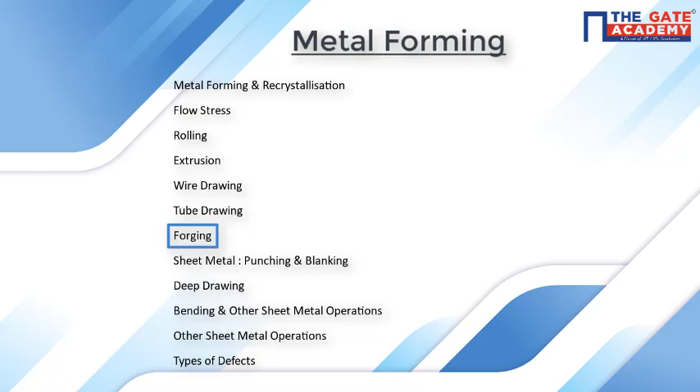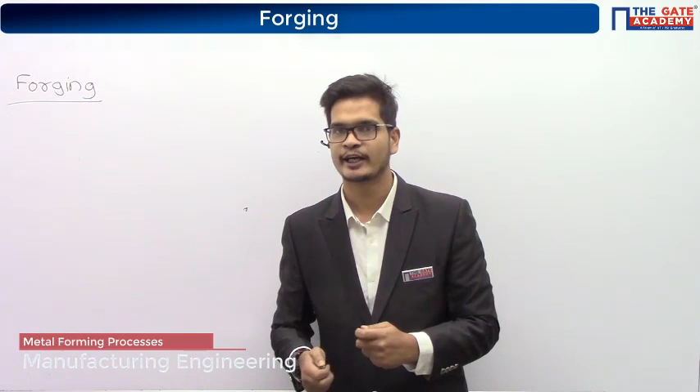Next we are going to start forging. If you are coming from a village area, you might have seen a forging operation. In villages, what they do is heat up a metal until it becomes red hot, and then they start applying force by using a hammer.

Because of the force applied by the hammer, the shape of the metal is going to change. This is called the forging operation. So the operation I'm telling you is very small scale. Just by using a hammer, they were able to change the shape of the heated metal.

What if you want to make a large size component? For large size components, in industries we have bigger presses. By using the force of those presses, we can change the shape of the metal.

So I was saying blacksmith. Yes, see.

Avengers second part, how did Thor make his Stormbreaker? Most probably he used a combination of casting and forging.

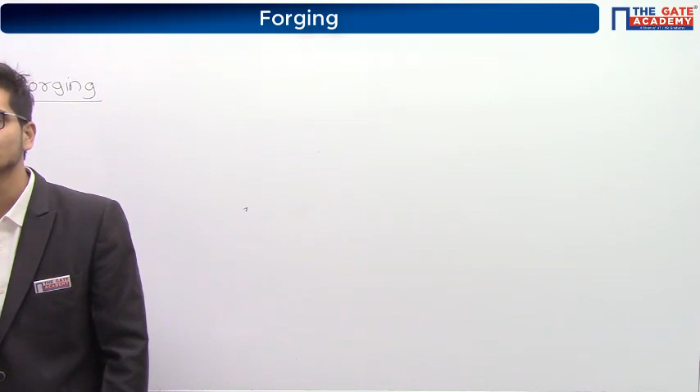In Game of Thrones, how do they make the Valyrian steel swords? By using forging. They heat up the metal, then they start applying the force. Because of the force, the shape of the metal changes. So this is the forging operation.

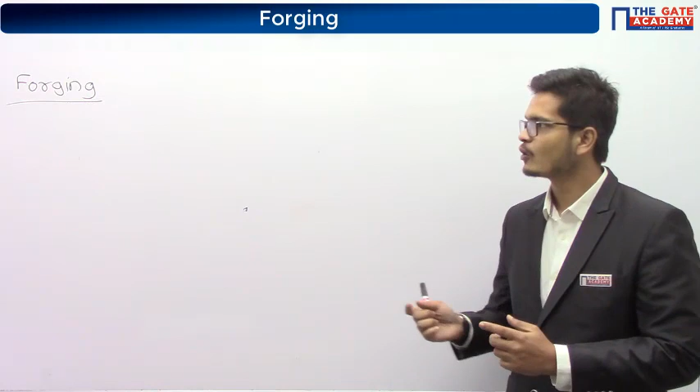All the processes that we have seen till now, whichever process - rolling, wire drawing, extrusion - in all these processes, what was happening is we are getting a uniform cross section. Whatever cross section was there in the initial component, that same cross section will be present throughout the component.

But forging is the only metal forming process in which you can get a non-uniform cross section. All the operations that we have seen till now give a uniform cross section - throughout the length we'll have the same cross section. But forging is the only operation in which you can also get a non-uniform cross section. So that is again one advantage in case of forging.

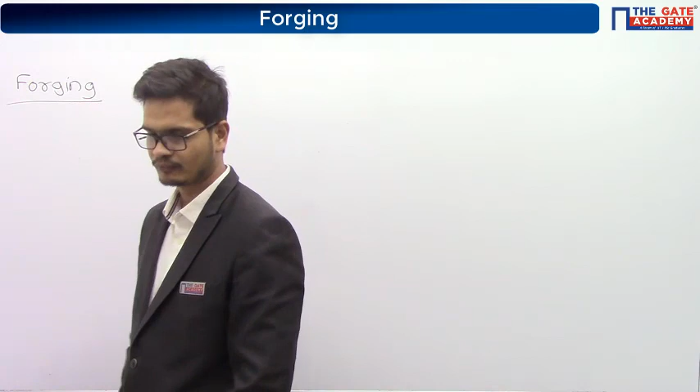So please write down, please start copying. Forging is the only process used for producing a non-uniform cross section component, whereas all other metal forming processes are used for producing uniform cross section components only.

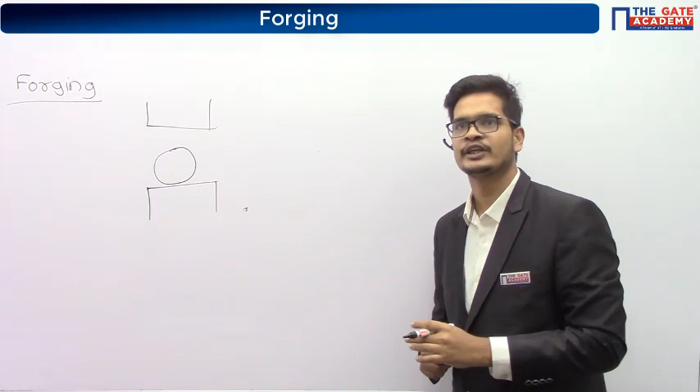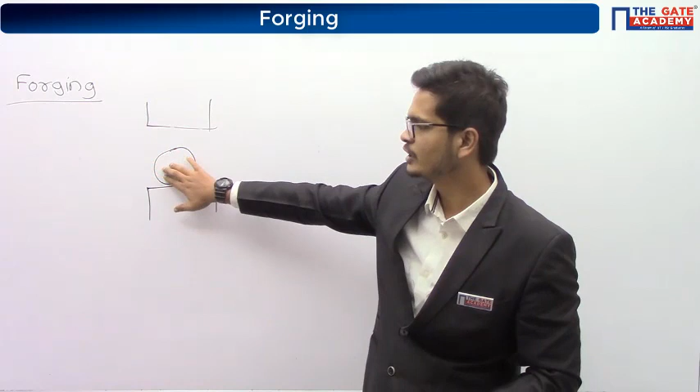Next point. Before dictating the next point, what happens is you'll have two dies. In between the dies, you'll keep the metal, generally heated metal. So we'll be using two dies, and in between the two dies we'll keep the heated workpiece. Because of the force applied by the die, the shape of this workpiece is going to change.

Now, how are you applying this force? Based on this, forging can be classified into two types. If the force is kind of an impact load - you are applying a load by impact, and it is an intermittent load, you applied the load then you remove the load - then it is called drop hammer.

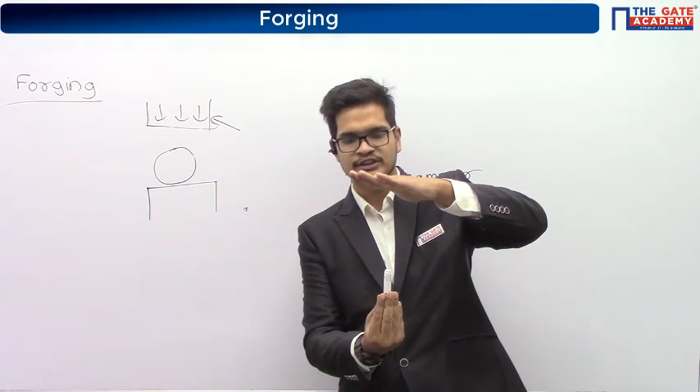You are just dropping a hammer. And if you are applying a continuous load - a press is simply continuously pressing the workpiece - then it is called press forging. So based on the load, forging is classified as drop hammer and press forging.

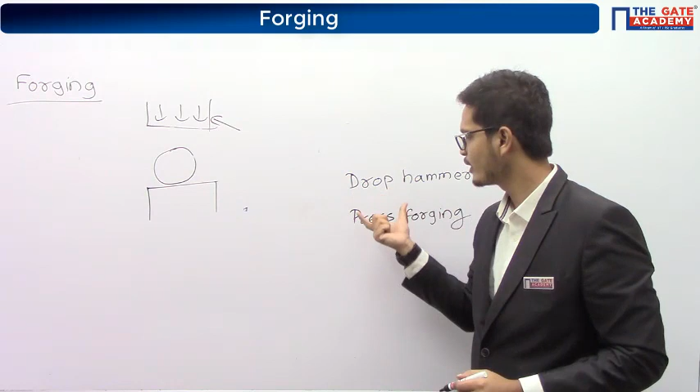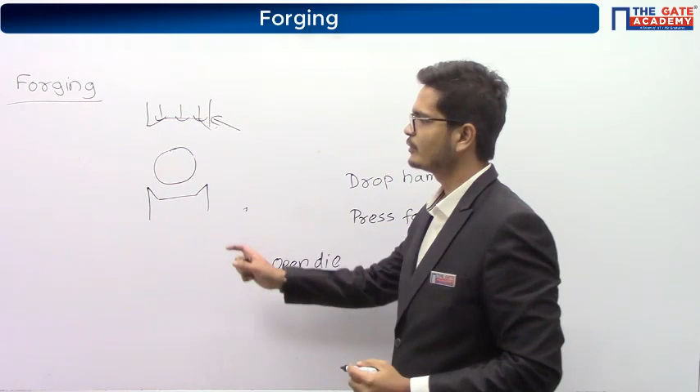Next, based on the shape of the die: if both dies are flat, it is called open die. And if both dies have some particular shape, the workpiece will take the shape of the die cavity when the die closes. So if the dies have a particular shape, it is called closed die forging.

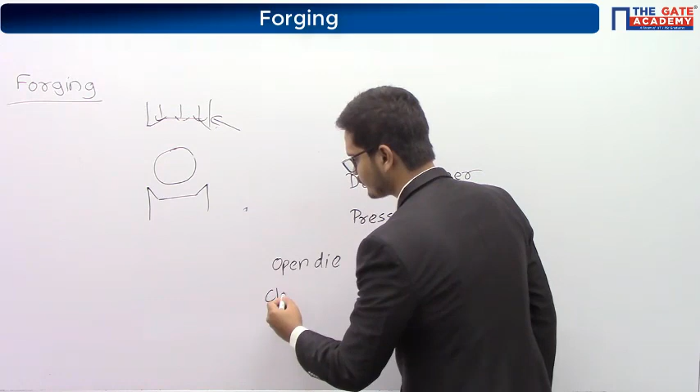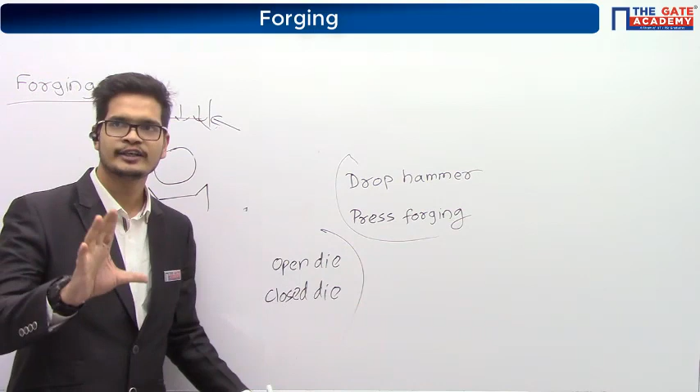So there are two ways of classifying: one is open die and closed die, and the other is drop hammer and press forging. This one is based on type of load, this one is based on the die used. Wait, I'll dictate all this.

Please write down. In forging, raw material is compressed between two dies until the required shape and size of the component can be obtained.

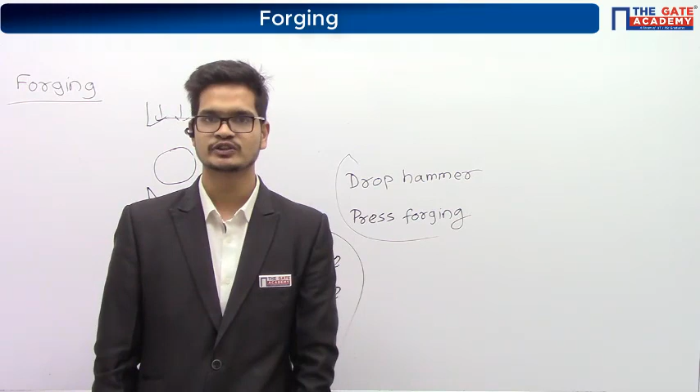Either by using a continuous force, or by using an intermittent impact load.

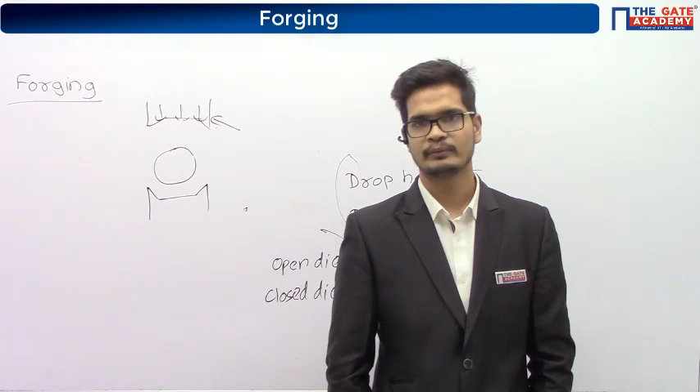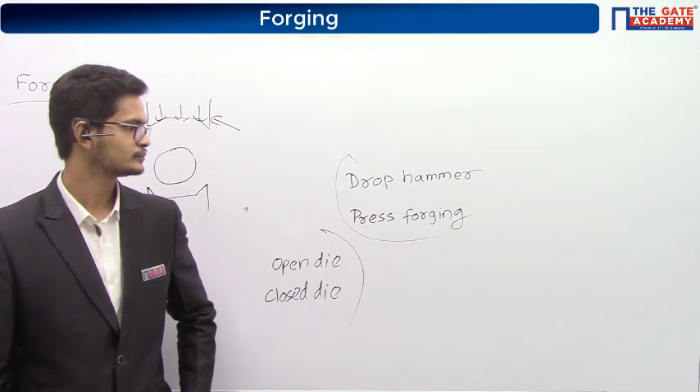Next point. Based on the load, the forging operation can be classified as drop hammer and press forging. First is drop hammer, and the second one is press forging.

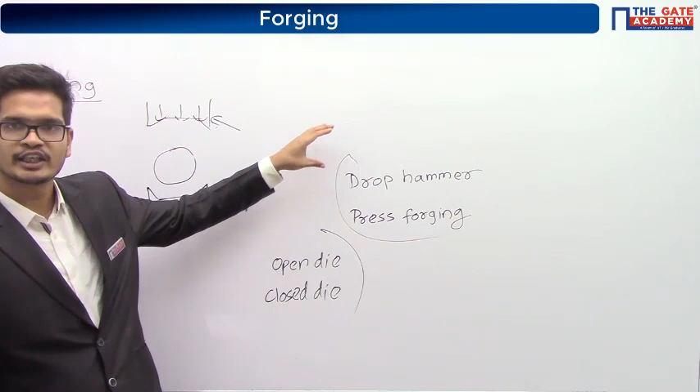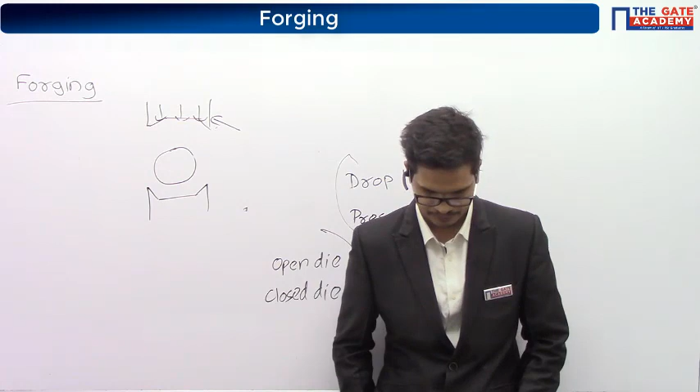Okay, next point. If the force applied in forging is an intermittent impact load, then it is called drop hammer forging.

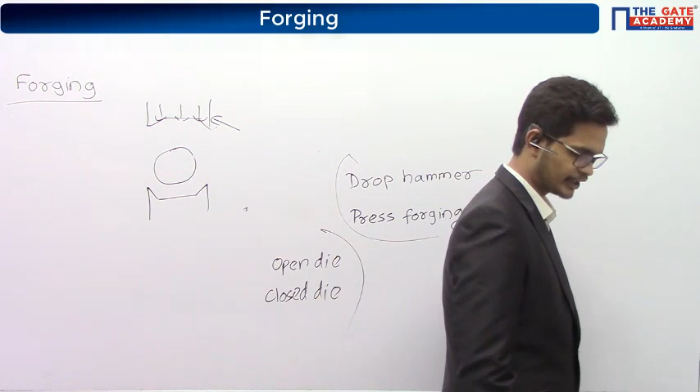Next point. If the force applied is continuous force, then it is called press forging.

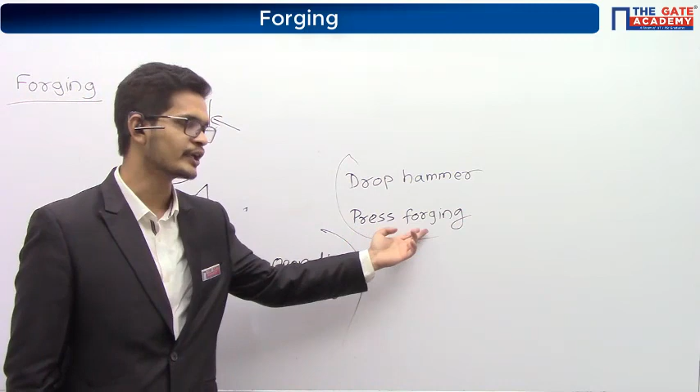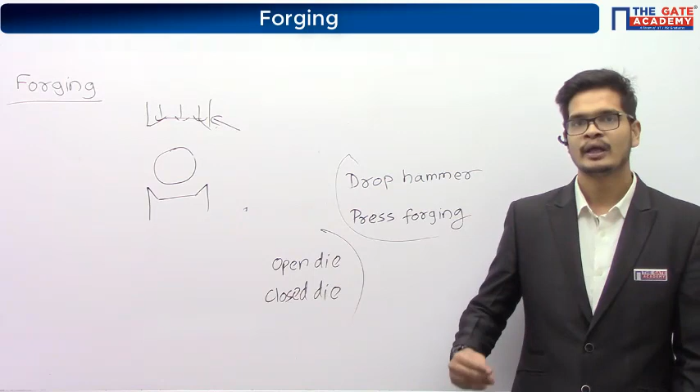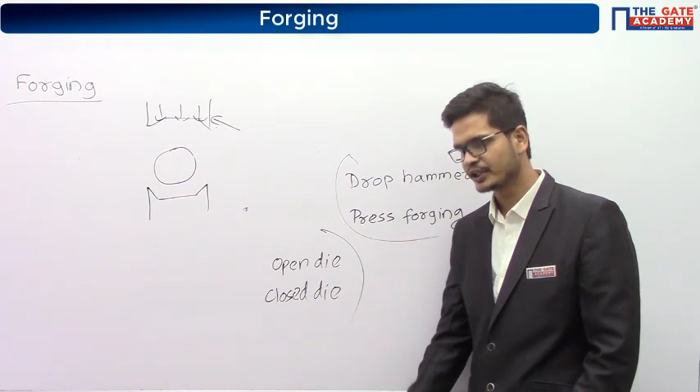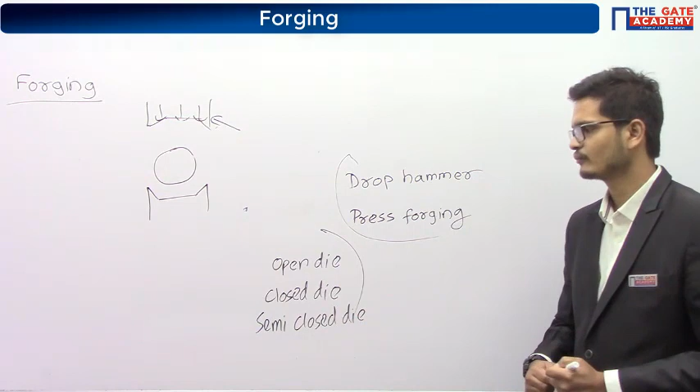Next point. Based on how the shape is obtained, forging can be classified as open die forging, closed die forging, and a combination of this is semi-closed die forging.

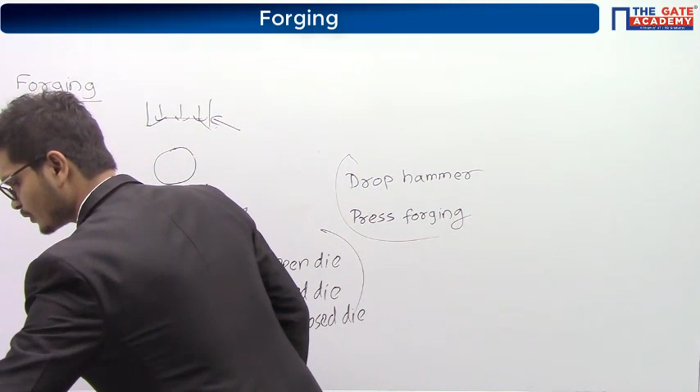Why I am telling this classification based on shape obtained - you will understand now.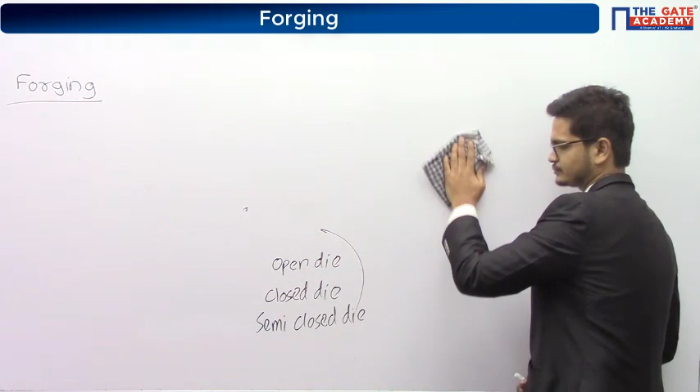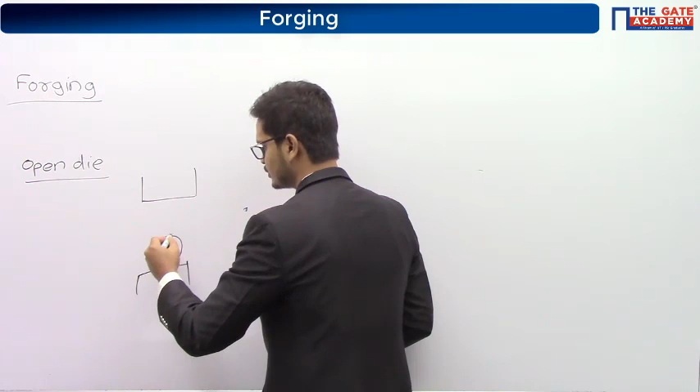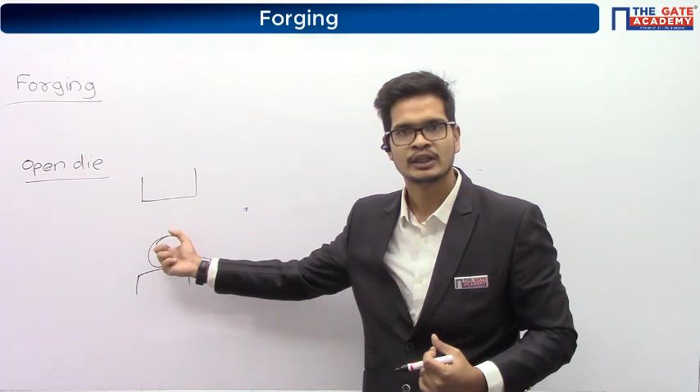See, first one was open die. In open die, we are using flat dies. So if you want to get a particular shape, what will you do? You'll have to change the position of the workpiece in between two loads.

Let's suppose this has come down, and when it comes down, it will make the top surface flat. And when it is making the top surface flat, the outer surface will have some projection, like this.

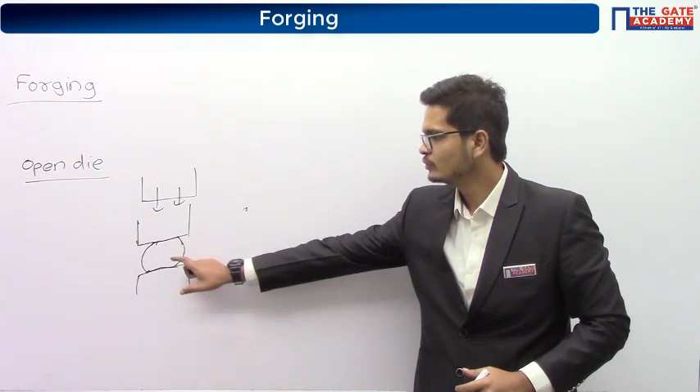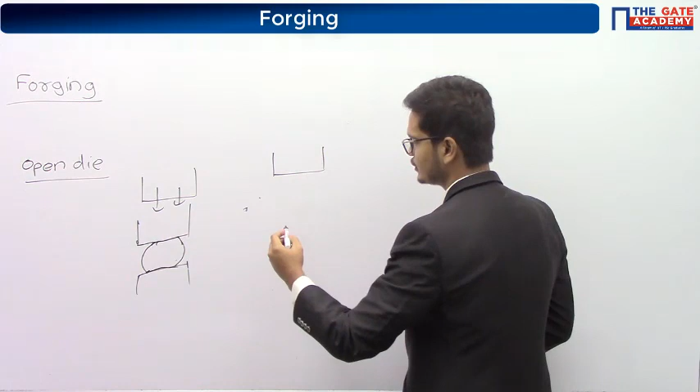Now you want to press at some other point, you want to apply load at some other point. You simply rotate it, you move back the die. The die will come back to the top position, the bottom die will remain fixed. Now the workpiece is looking like this.

Again this die will come down now and it will apply load here, on this. And again we'll be able to change the shape. Hence, for getting a particular shape, what we are doing here is changing the position of the component in between two loads, in between two strikes.

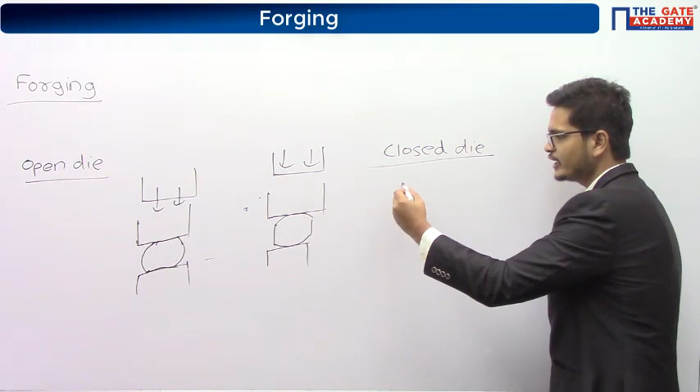Now in closed die, what is happening? In closed die, whatever is the shape of the die cavity, the workpiece will simply take that shape - the workpiece will take the internal shape. This is closed die forging.

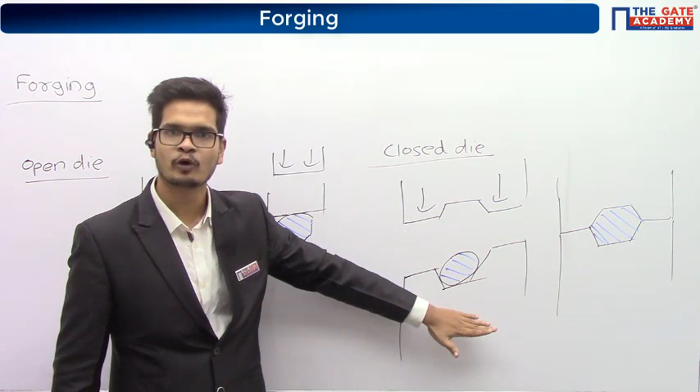In semi-closed, what will happen? We'll have only one bottom die with a particular shape, and the top die will be a flat one. That flat die will apply the load, and the workpiece will take the shape of the bottom die.

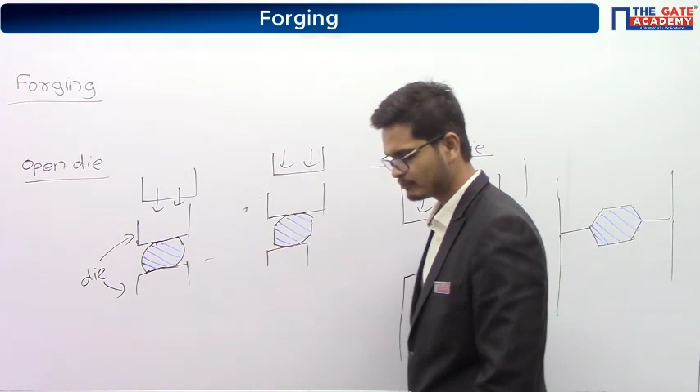So please start writing this: open die forging. In open die forging, two flat dies are used. The bottom die is fixed, whereas the top die is attached to a ram, and it comes down along with the ram.

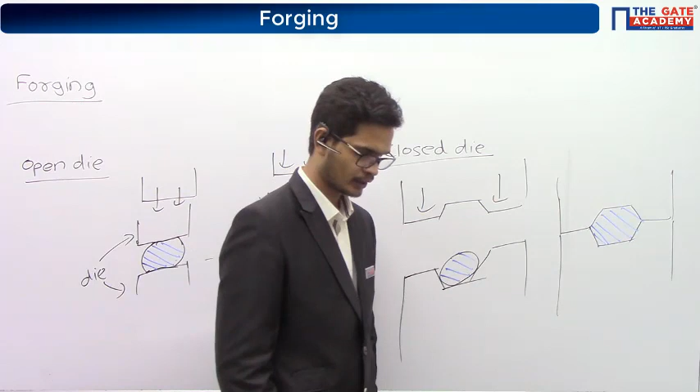Next point. The shape and size of the component is obtained by changing the position in between the blows, in between the loads or blows, you can say.

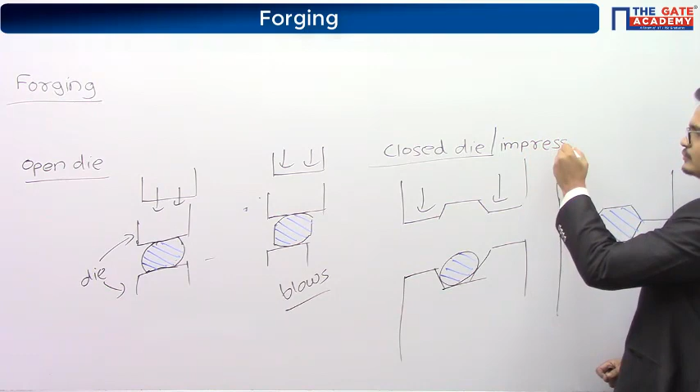Okay, next is closed die, also called impression die. In this, the shape and size of the component - so we are writing about closed or impression die.

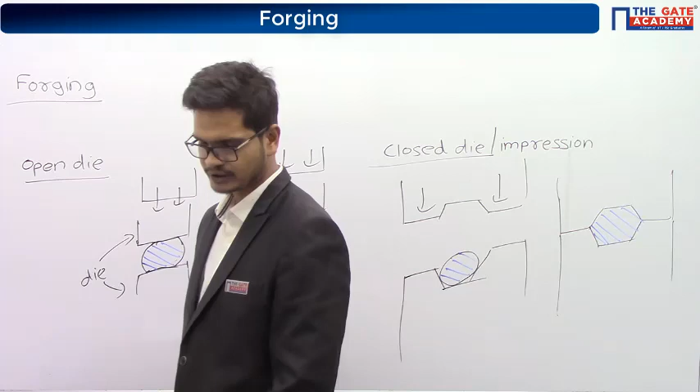In this, please write down: shape and size of the component obtained is same as that of shape and size of the two half dies. That is the shape of the dies.

Is impressed upon the component. Hence it is also called impression die forging.

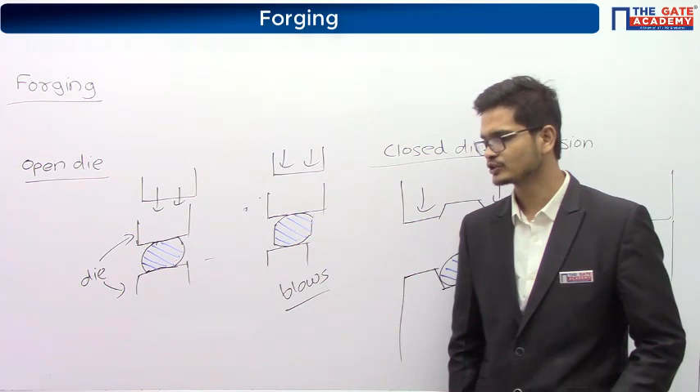In this, the shape and size of the component is same as that of the half die.

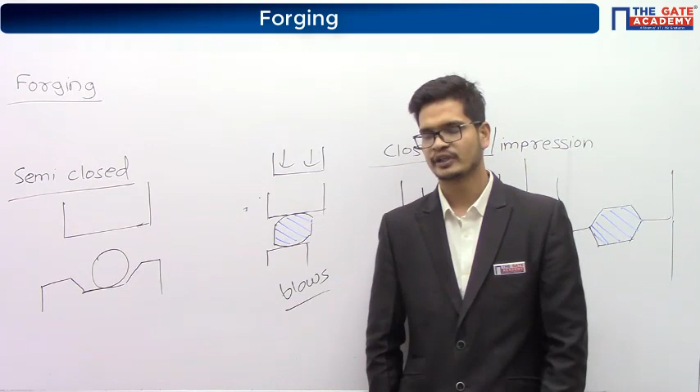Next point. In this, the position of the component can be changed in between the blows.

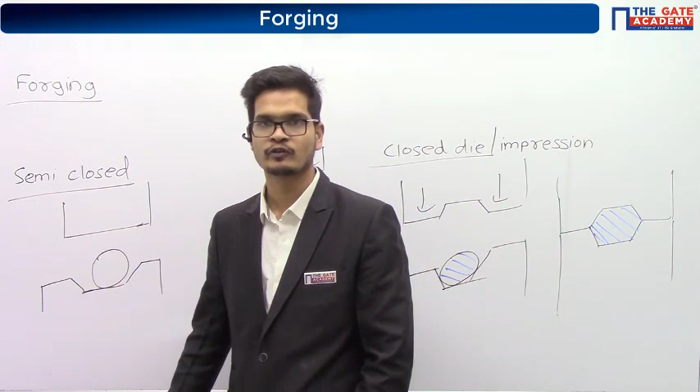So out of the three - open die, closed die, and semi-closed die - only in open and semi-closed die can you change the position of the component. In closed die, once you have started the operation, you cannot change the position.

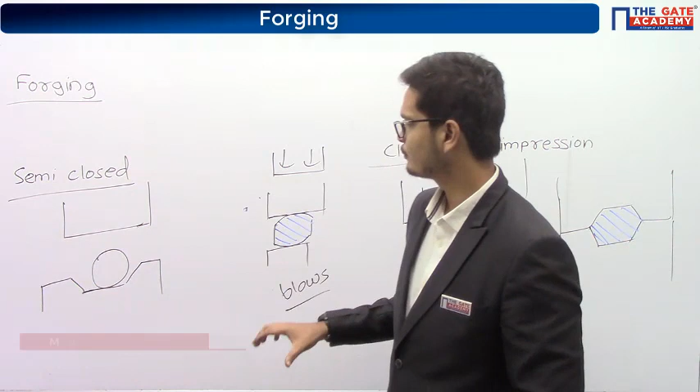Now let us say you are performing an open die operation. Let's say you want a product of uniform thickness.

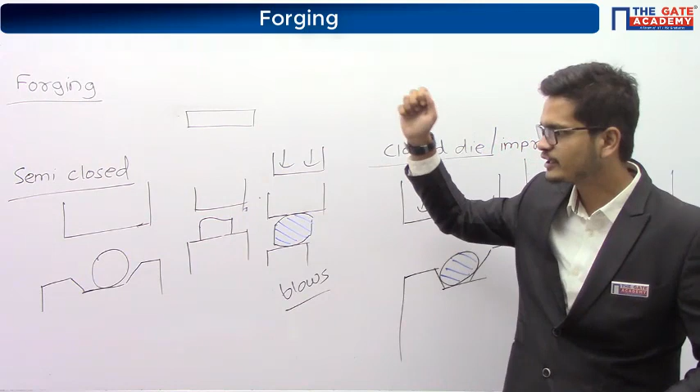But you have got a product of non-uniform thickness. At one point there is more material, at another point there is less material. What will you do? You are doing open die forging operation and you want a workpiece of uniform thickness, but there is more material at one point and less material at another. Edging is okay, but what is happening behind it? Wherever more material is present, at that point you will apply the load, and you will make the material flow towards the area with less material, to get the uniform thickness.

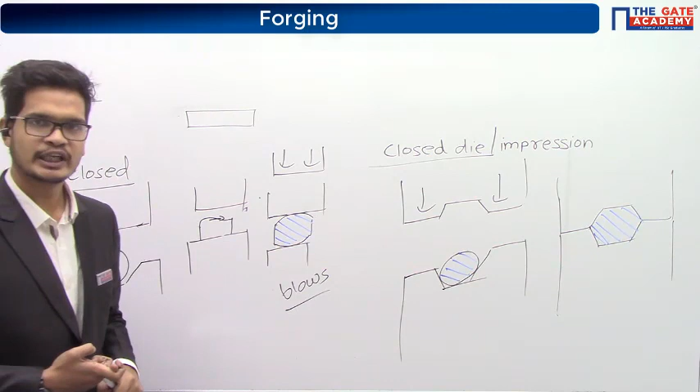The same thing you can do in semi-closed die also. But in closed die, first of all, you are using a fixed shape of the die, so you cannot change the direction of the force.

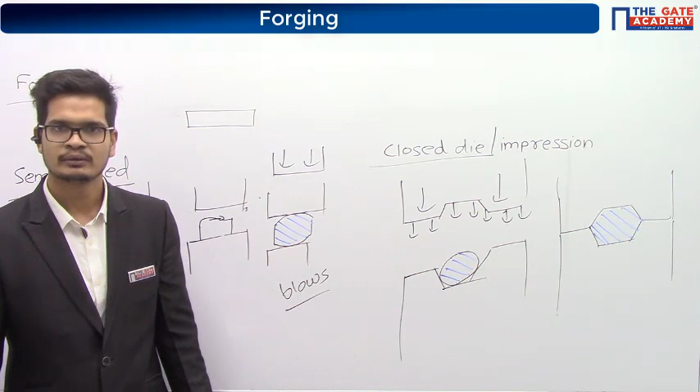If more material gets collected at one point, due to the flow of material, we cannot exactly predict how the material is going to flow. What if more material gets collected at one point, and because of that, less material is present at another point? In this case, we cannot change the direction of the force. Therefore, if more material gets collected at one point, a cavity will be formed at the point where there was lack of material.

Now to avoid that, what we are going to do is, we'll always take the volume of raw material nearly 20 to 30% more than the required volume of the workpiece, so that even if more material gets collected at one point, there is no lack of material for another point.

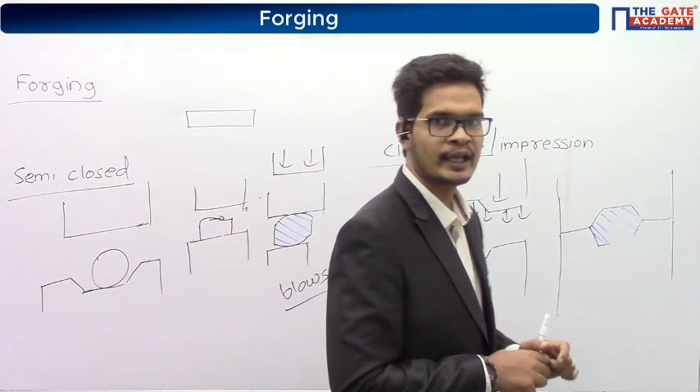But what will happen is, if you are using more material, the dies will not be able to close properly. Hence we'll have to give some space on the dies, so that the excess material that you are using can flow into that. Now, because of this, some projection will be formed on the workpiece.

The projection that is formed on the workpiece is called the flash. And the extra space that you gave on the die is called the gutter. So, extra space given on the die is called gutter, and the extra projection found on the workpiece because of the gutter is called flash. Later, the flash is removed by a trimming operation.

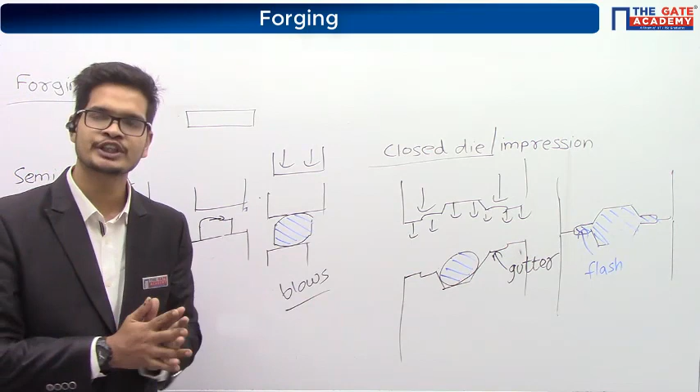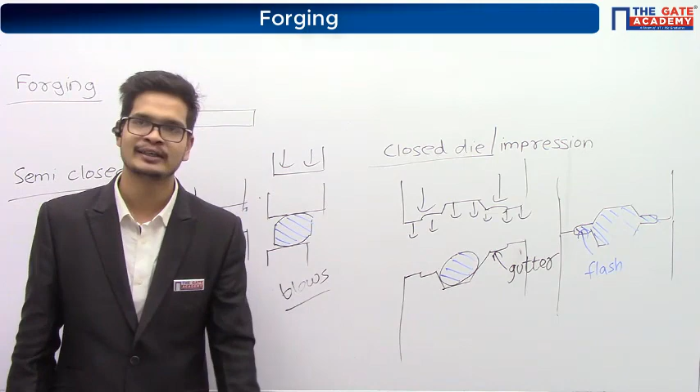It's easy now, they kept the name gutter, so you'll always remember it. If they kept something difficult, you'll forget, right? So it's easier this name, better for you. In fact, it's a very popular question in different exams: what is the extra projection on the component called? It is called flash. What is the extra space provided on the die called? It is called gutter.

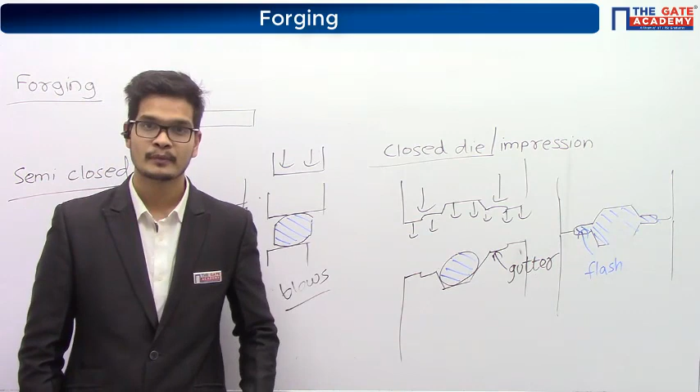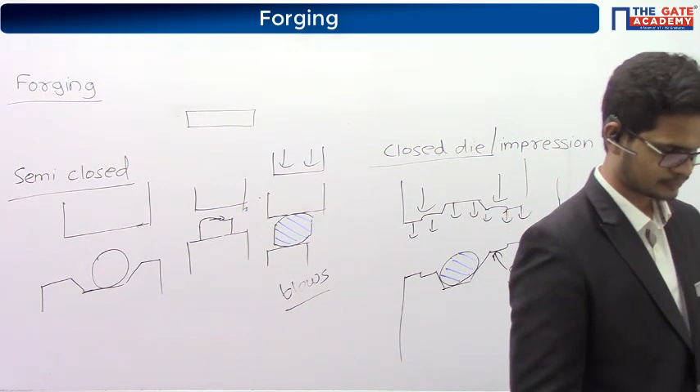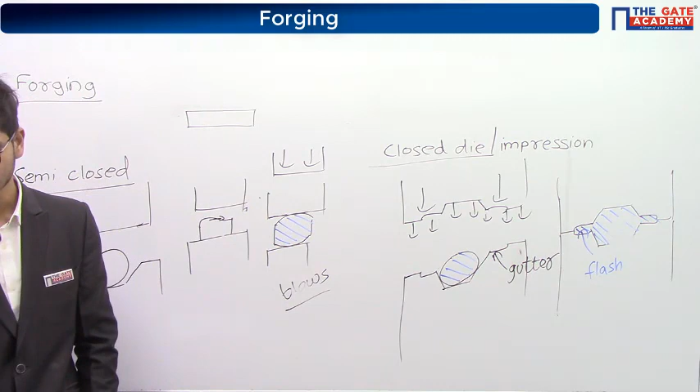So please write down: in open and semi-closed die, if excess material is present at any location, and there is shortage of material at another location, we can apply the force and make the material flow from the excess location to the shortage location. Hence there is no need for extra metal.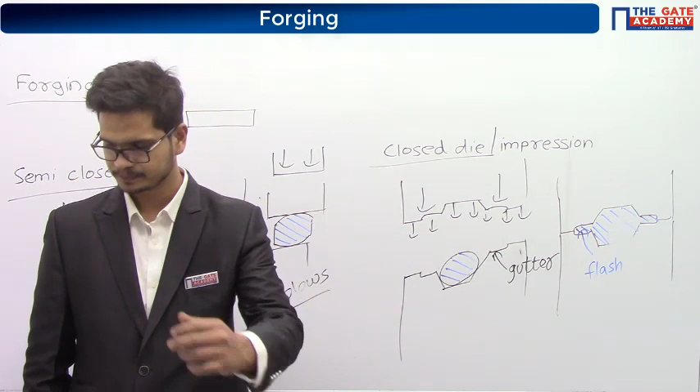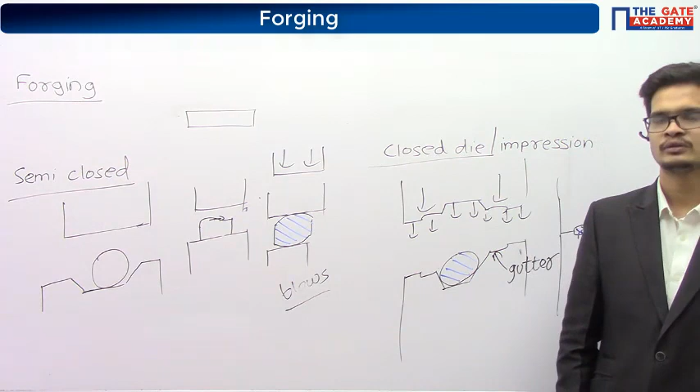But in case of closed die forging, if we take the volume of raw material same as the volume of the finished good, and more material gets accumulated at one point, then there will be shortage of material at another point. This will lead to the formation of an unfilled zone.

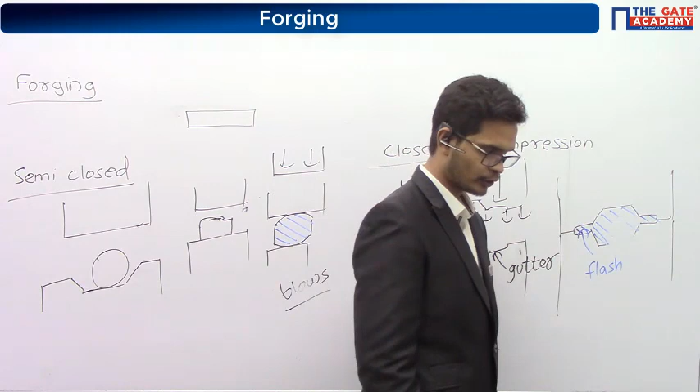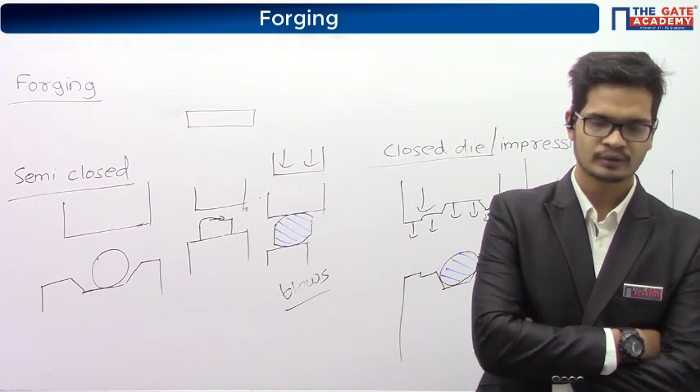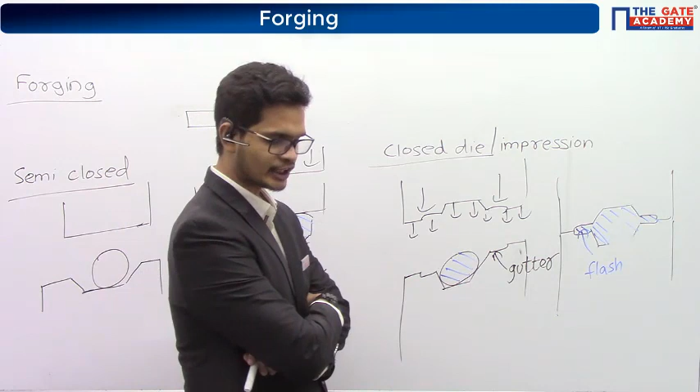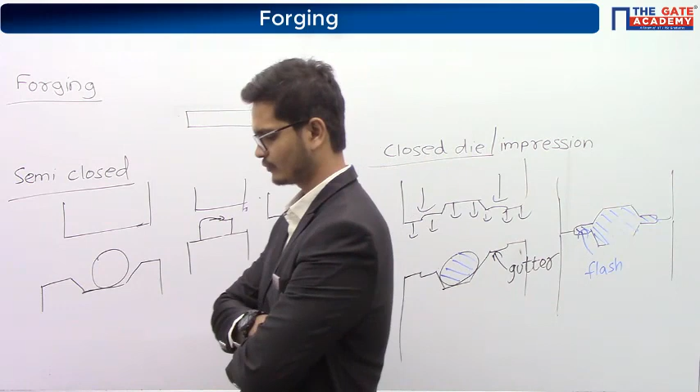To ensure that the die is filled completely, some excess material will be taken, and some space must be provided on the dies for the flow of excess metal, so that the dies are able to close completely.

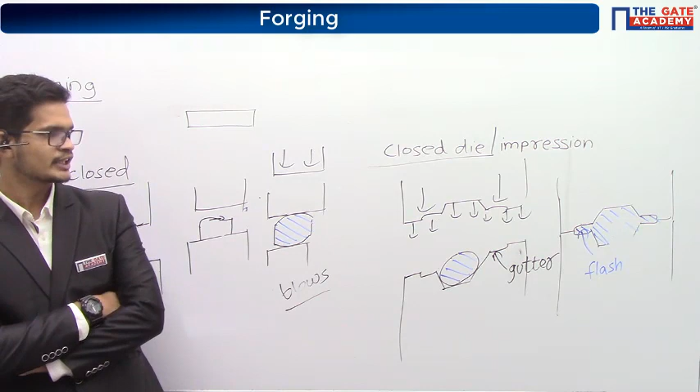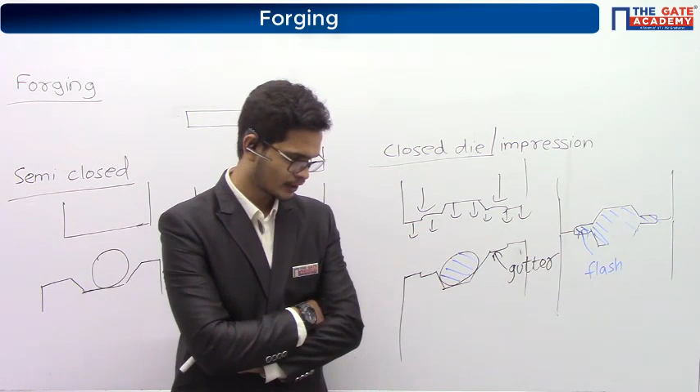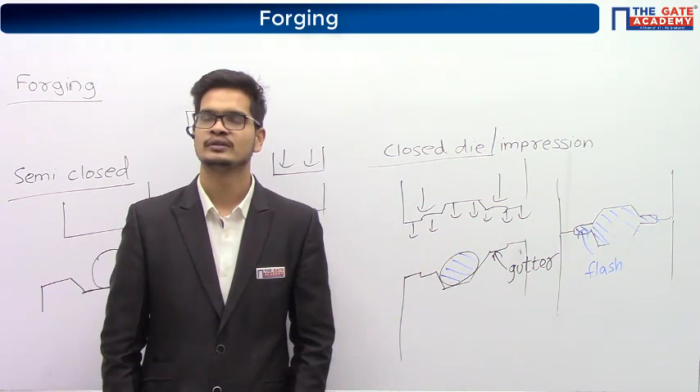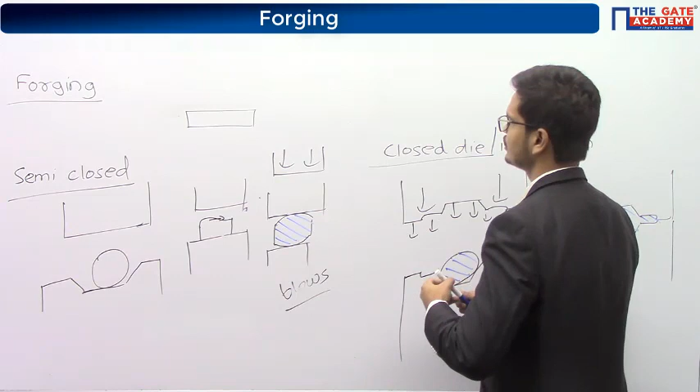This extra space provided is called the gutter. Because of the gutter, some projection is formed on the component. This projection is called the flash. This flash is removed by a trimming operation.